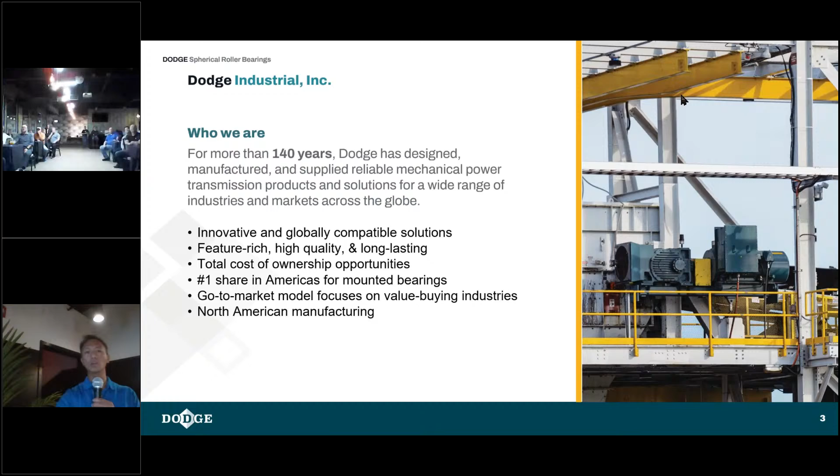The other thing that we want to do is innovate. This is another core belief that we have. We're always trying to improve products, yes, but we're also improving systems and ultimately offerings for our customers. The goal again is our customers. We want them to perform at the highest level possible. A couple of the innovations over that 140 plus year time span: Dodge created the first split wood pulley back in the late 1800s. And then in the late 1930s, we created the taper lock bushing. You see this in every sort of belt drive application throughout North America and around the world, so it's a really familiar product.

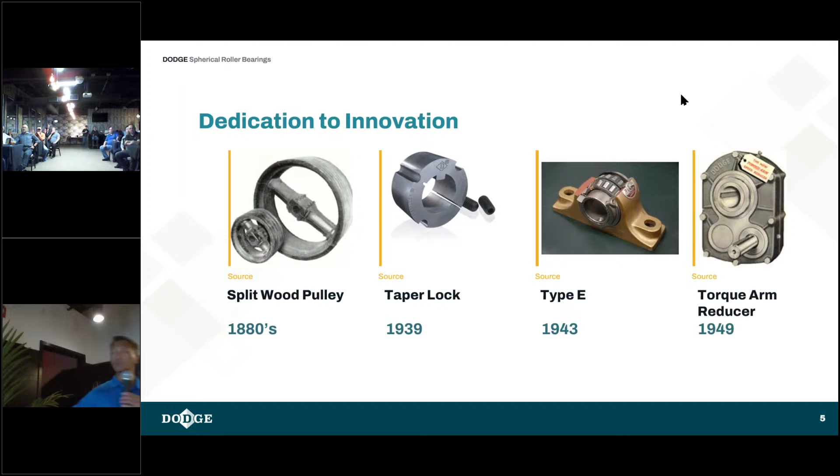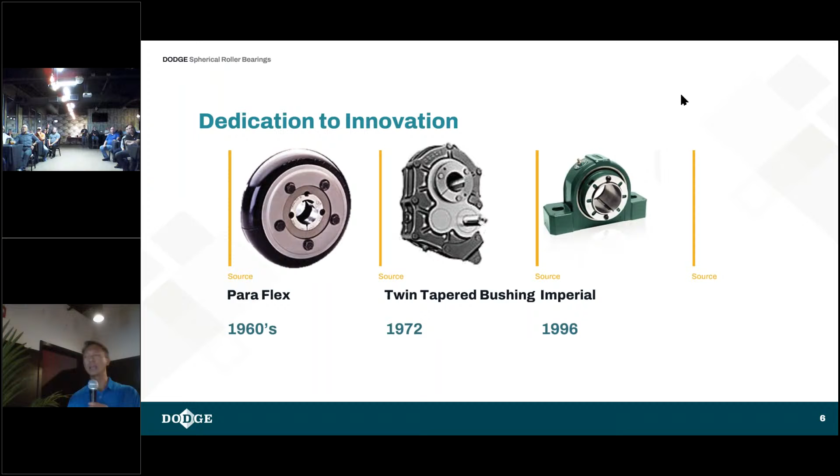In the late 40s, we created a shaft mount gear reducer. And on into the 60s, we created one of the first rubber tire couplings. And not to sit on our laurels, we make a product, we introduce it, but we continue to improve it. So in the 1970s, for the gearbox that we introduced in the 1940s, we created a twin tapered bushing locking mechanism, so it allows you to take the shaft off or install it really easily. And then in the late 90s, Dodge in-house developed a new locking device for bearings, the Imperial lock. And that's what we're going to talk about tonight.

In the past decade, we've introduced other products focusing on specific industries like the food and bev industry, requiring higher demand for safety and cleanliness. And we've even improved on our Imperial bearing that we came up with in the late 1990s by making the safety mount.

And again, we're going to talk about that this evening as well. And not to say that Dodge is completely a mechanical company, we've dedicated resources to producing our smart sensor, which is a condition monitoring device. That's our entry into the Industry 4.0 sphere.

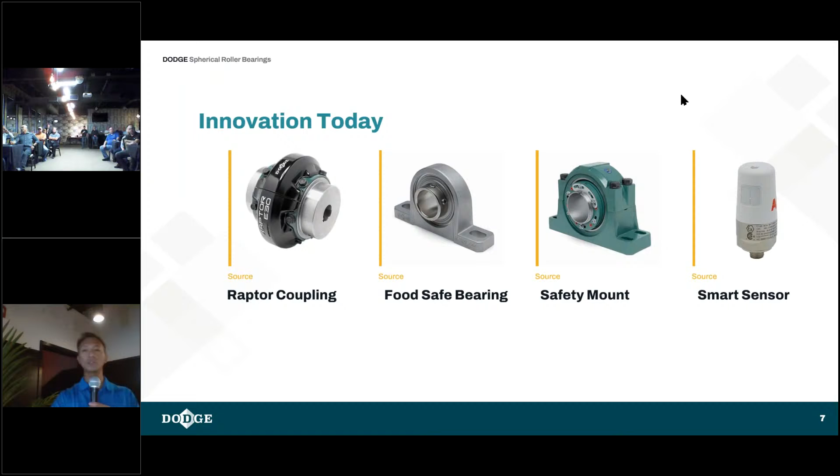So our spherical ISAF, what is it all about? Throughout your facilities, you'll see a fairly common bearing called the SAF. It comes in multiple pieces, assembled on site. There's a lot of interchangeable parts with many different manufacturers, so it makes it easily accessible to the masses. But Dodge, we found a different way of approaching the same problem.

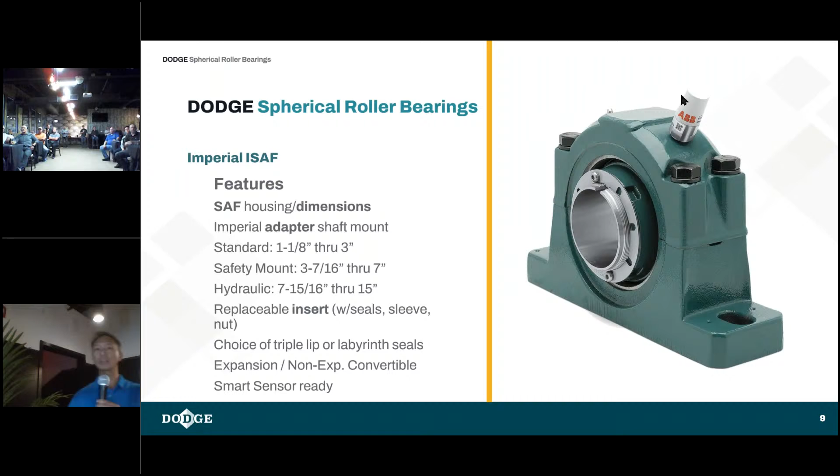With the SAF, the ISAF, it's the same footprint, so it's drop-in. We've introduced that Imperial adapter shaft mount to it. We have a full range of shaft sizes that we can work with. And the difference in the product is it's insert based or cartridge based. We're going to get into that a little bit later on here.

So what's the first thing that you think is going to happen to this thing? We've seen this graphic before, I'm sure. The majority of premature bearing failures, 80% of it is lubrication based. It's old, it's wrong, there's not enough, you name it, solid or liquid contamination. How do you mitigate that? How do you make sure that that doesn't happen?

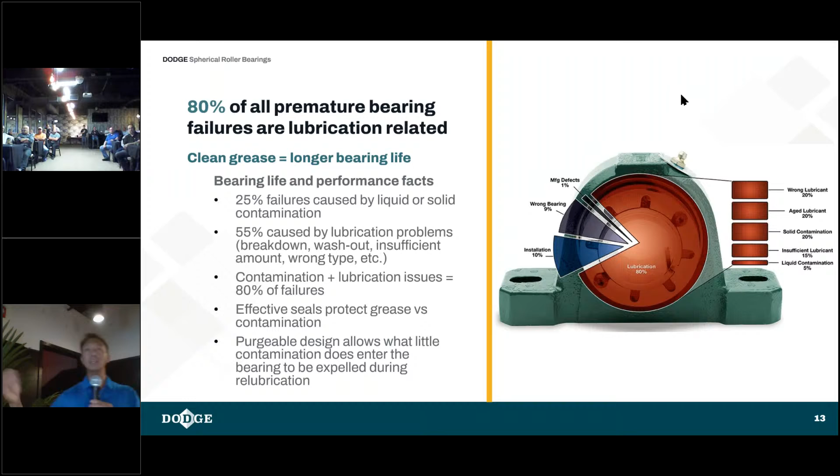There's 3 things you should be doing. Number 1, don't introduce it in the first place. Number 2, after you install it, you want to prevent contamination from getting in. And third, you should have some way of actually purging eventually what's going to happen inside that bearing. Contamination is going to enter, especially if the material is really fine. It's an eventuality. So how do you get rid of that?

Well, is this the environment that you work in? Does this look familiar? Maybe a little bit of an exaggeration, but not necessarily in some places. You have an open bearing you're working with here, so you're packing grease in that environment. What do you think is happening? You're introducing contamination from day one. Now, wouldn't you rather have something that just ships completely sealed, ready to go from the factory?

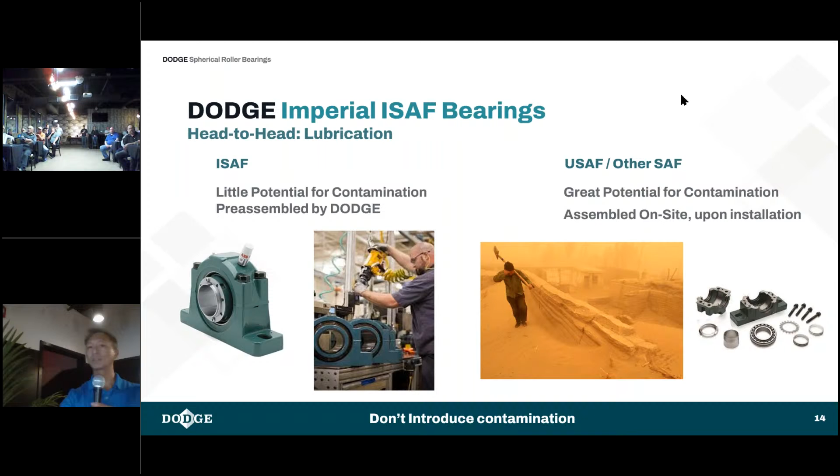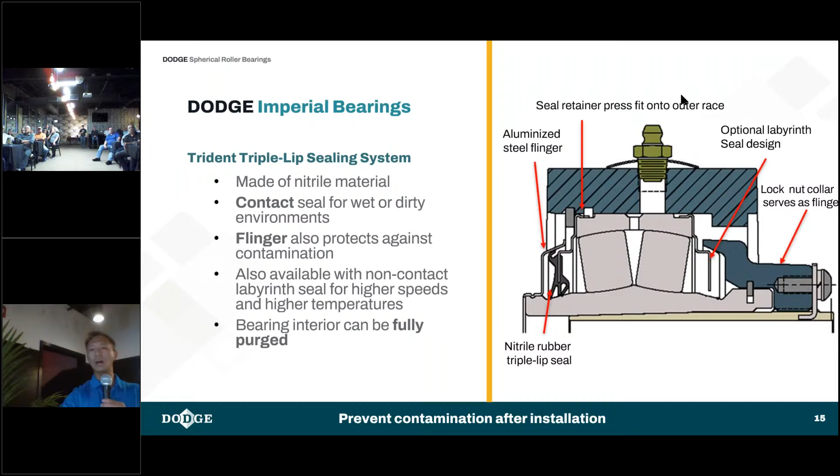So when you're pumping in fresh grease, it's a shell game. You're actually just moving the contamination over into this cavity. And then to add a little bit more pain, those LER seals are grooved, so you're moving more contamination into the groove now. As you can imagine, how much contamination are you actually pushing out of this particular type of bearing?

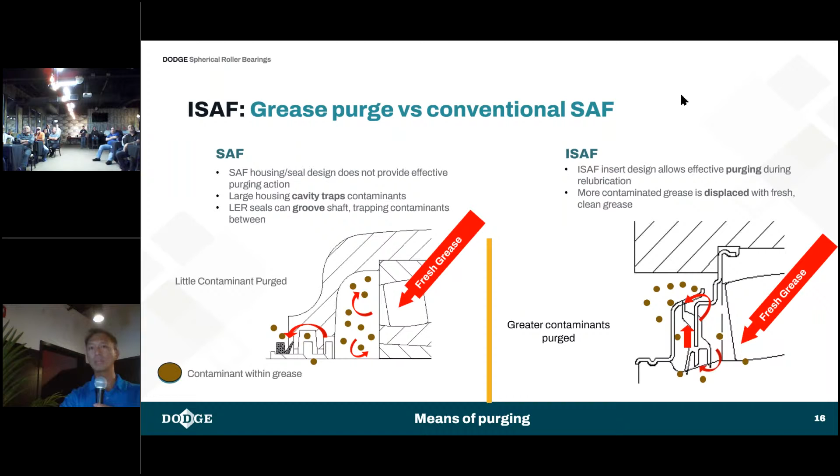Now, compare that with our ISAF. It's insert based. When you purge grease, you notice the shape of those seals are fairly unique. It's a one-way street here. We're pushing grease, it goes out with the contamination, and everything that's going with that grease is purged out. That's what we want to do to properly maintain the life of that bearing. So how is it that we can do this? Because as you can see in this picture, you can see that grease being purged out. It's rotating.

That's pressurized, we're using some means of pressure to push that out. Normally with a lot of bearing seals, you apply pressure to any seal and it's popping out. That is traditional seal design. Why does this happen with Dodge and that seal is staying intact? It's not popping out. Why is that?

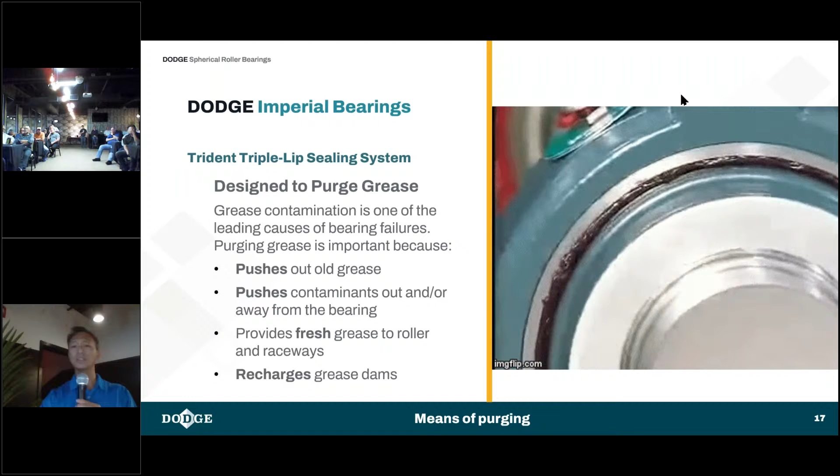It's because the seals are mechanically retained, so no human hand is actually touching that to insert it into the housing. It's a robot that does that. It pinches the seal so that you can apply whatever normal pressure you would, a grease gun, an auto lubrication system, whatever it is, you're pushing that grease out with its contamination. You're getting that fresh grease, and you're getting that fresh grease dam as well. So those are 3 things related to lubrication that really restrict contamination with our design.

Oh, by the way, let's talk about how much grease you're going to use. The factory knows how much grease fills that insert, and they're going to get exactly the right amount all the time. So in the field, when that SAF bearing is open, what are you doing with the grease? You're buying 5 times the grease to pack this thing in that exposed, contamination-based environment. And the funny thing is, I would hope the first thing you do after you pack all that grease with all that crap is purge it out. Does anybody do that? That's not the first step. So realistically, you could be spending 10 times as much grease to make sure you're doing it right.

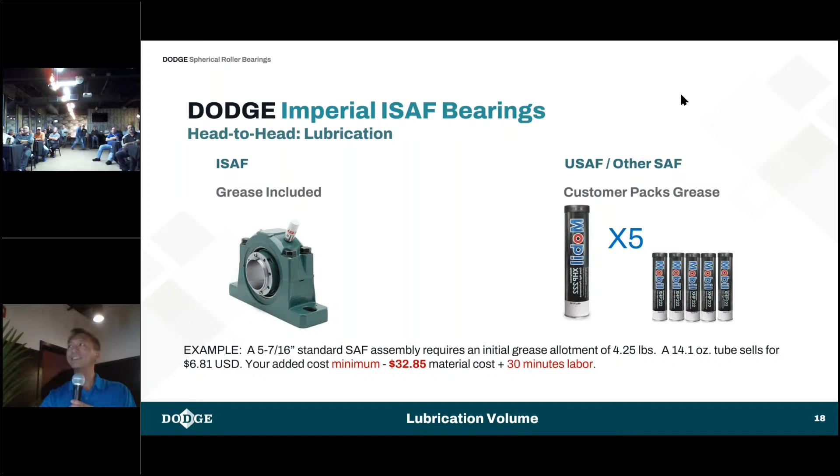So what other things should you consider an ISAF for? Well, it's one part number, right?

What's another good reason? How about this - it's easy to install. You guys know what feeler gauges are? How many of you have actually worked with feeler gauges? Yeah? You have a skill set. If you've worked with feeler gauges, you have a very particular skill set, and it's an absolute rarity to know how to do this effectively and properly.

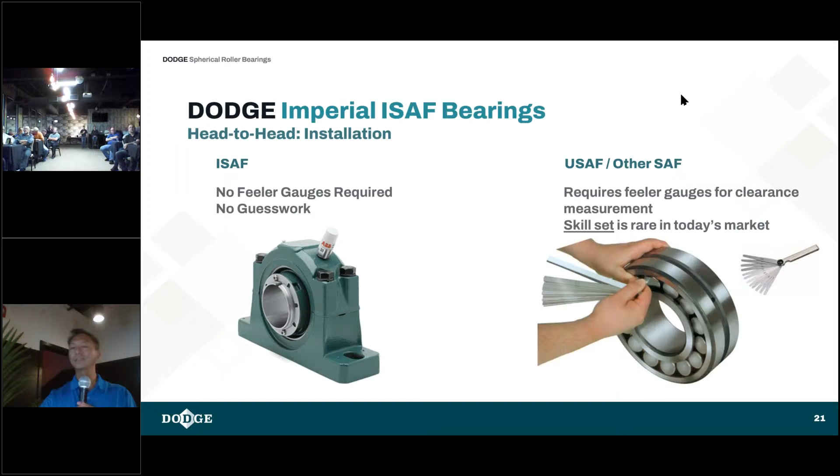So ISAF bearings, no feeler gauges. You don't have to stick those feeler gauges in here. I'll show you how to take the clearance out of these things. There's 4 steps to making sure you take out the clearance, check the clearance, etc. And these 4 steps, you may have to repeat them. If you don't get that clearance out, you're going to have to repeat this. And as the bore, the shaft size gets larger, it gets a little more difficult to do this process. You require more people, you require more time.

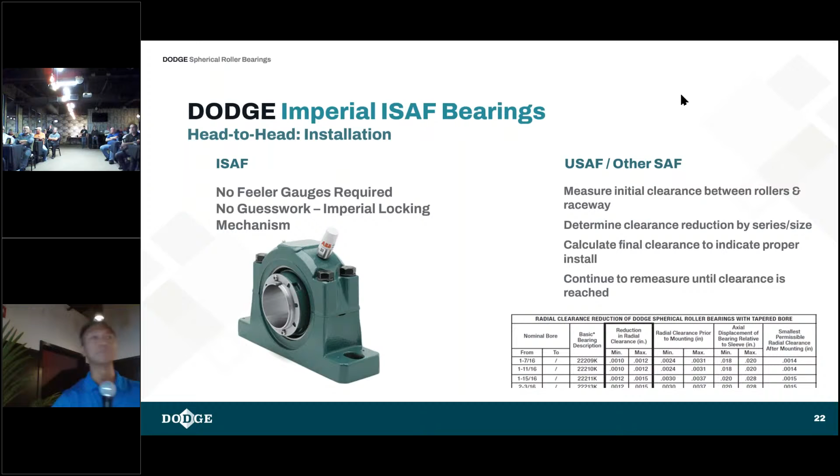So how do you install a Dodge ISAF? Turn something clockwise, that's it. That's all you're doing. In fact, you're hand tightening it to a 0 reference. And then I have a chart that tells you, whatever diameter it is, you put it through a couple more turns, either with a spanner wrench that has leverage or a hammer and drift. That's how you mount it. No feeler gauges - this actually takes the clearance out, sets it for you perfectly. And how does that happen?

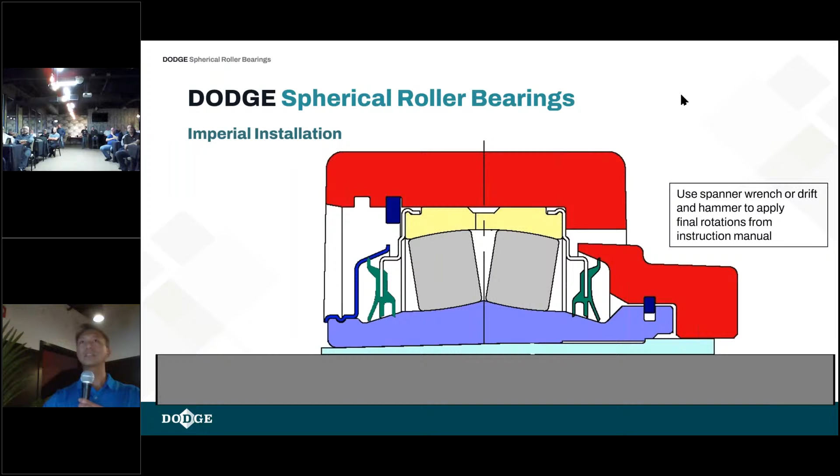If you focus on the blue wedge there, when you hand turn it, it moves, it pushes. Then when you use that spanner wrench or hammer and drift, you're locking it into place. See what happens? We'll back it up here. So it pulls. That's why we call this a push-pull adapter. That effectively sets the clearance for you, so you don't have to worry about feeler gauges.

Just as easy as it is to mount, it's easy to dismount as well. With traditional SAF bearings, there's a real challenge with dismounting these bearings. So how do we do it with our ISAFs? Counterclockwise, same process.

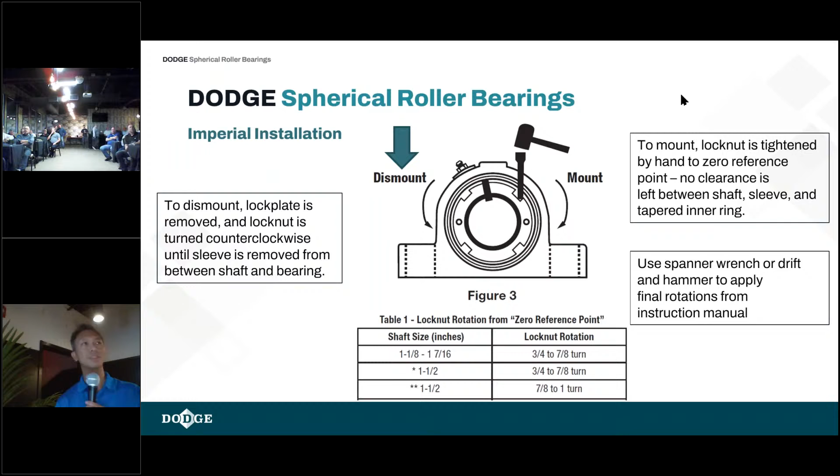This is one way to remove an SAF bearing. Don't know if the sound will go through, but so how many of you have actually seen that before? Yes? Winner. Yeah, you may have done this yourself.

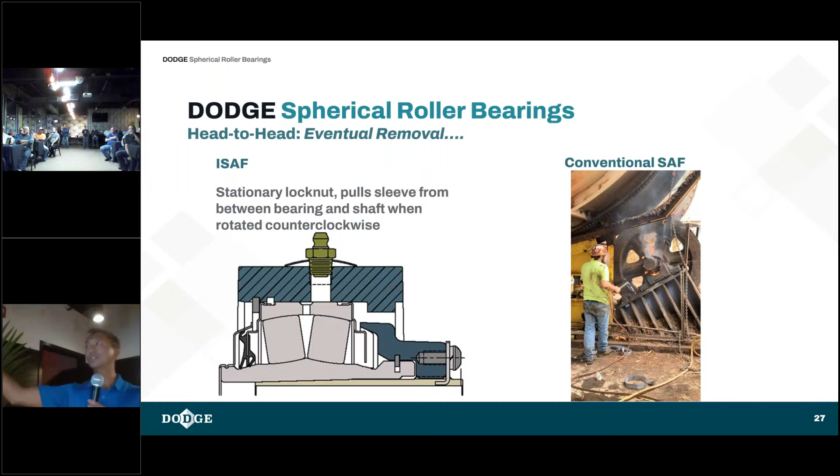What does this require in a facility? You're going to need some sort of permitting, right? This is hot work. You're going to need time. You're probably going to need a new shaft after you do this, right? So look, with the ISAF, this isn't how you dismount. This is a lot easier to work with, right?

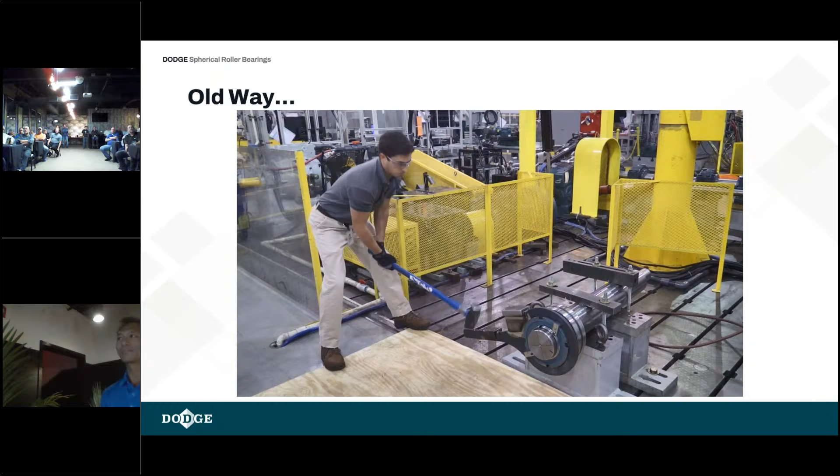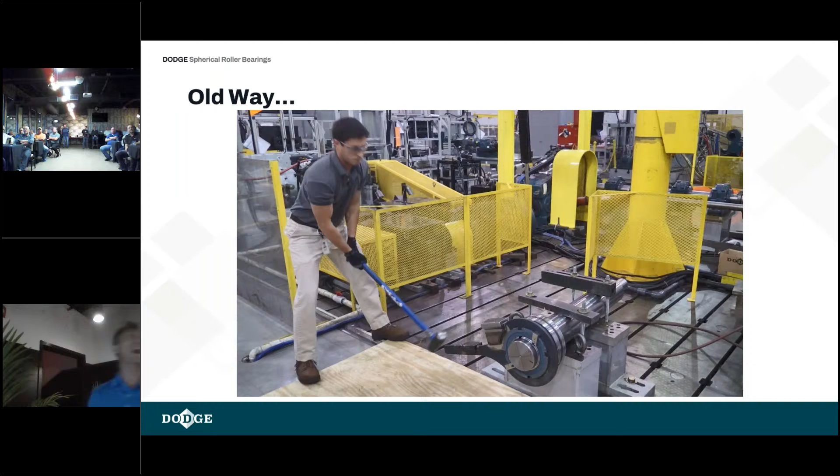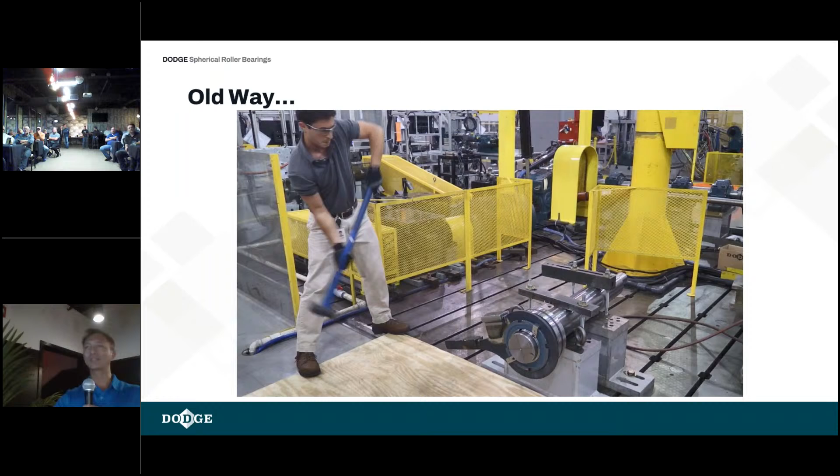Here's another nice little video you can see. Have you seen this? That's too painful to watch completely, so we'll just cut it short there. This is another way of unlocking that adapter from that shaft. That's usually the first resort before you take that torch out.

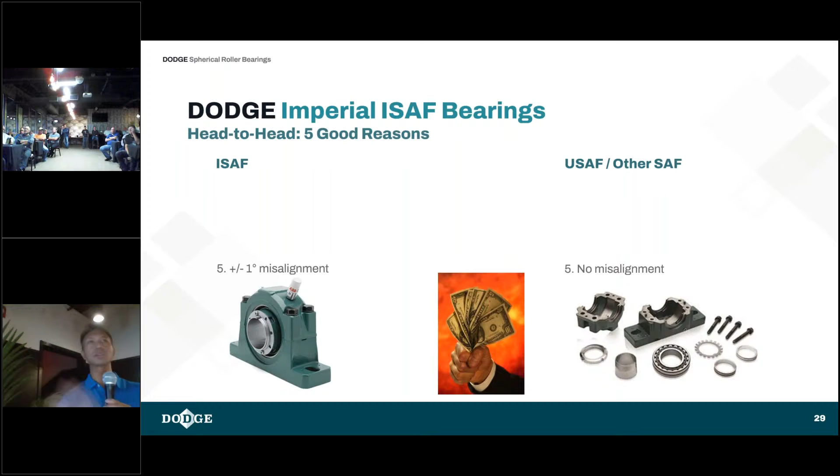Another good reason I'll share with you, the last one — this is about misalignment. With the ISAFs, there is plus or minus 1 degree of misalignment. We all live in a perfect world with no such thing as misalignment, right? So when you're working with an SAF style, there is no capability for that seal to handle that misalignment. The difference with the ISAF is that seal is contacting 100% all the time, and it's an insert cartridge that moves with the shaft — so does the seal, it's moving with the whole insert. That's where that misalignment capability comes about. With an SAF, you can go a little bit off kilter, and now you're depending on the seal to deform in a way it was never designed to handle misalignment. That can be dangerous — you go too far and that seal just opens up.

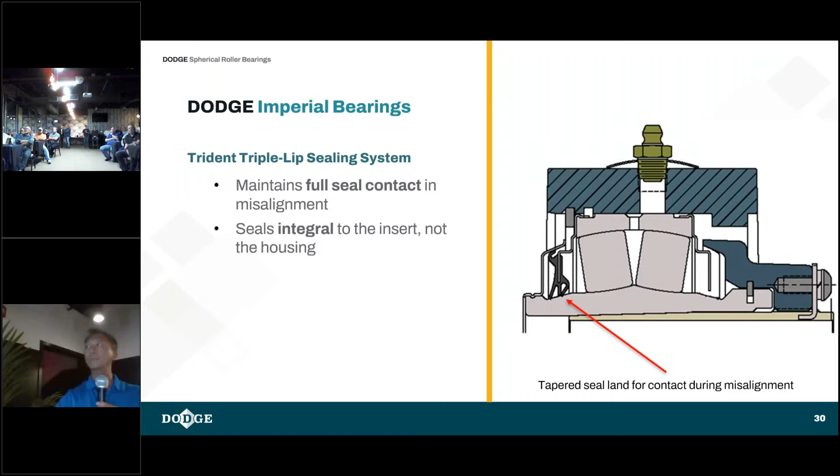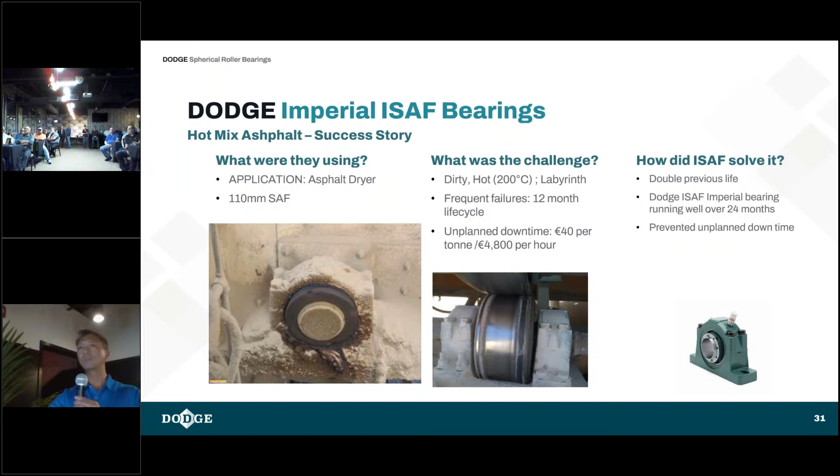What did ISAF do for them? They doubled their previous life — that means 24 months plus. And of course, they prevented any sort of unplanned downtime because they weren't sure when within that 12-month cycle that SAF bearing was going to fail. That's where good condition monitoring works, right?

So is there a way we could improve this design? Why would we need to? Would we really need to? This is the third core principle that Dodge has. We make high quality products, yes, but we want to do it in the safest possible manner. If we can increase the safety level of that product as you're installing it, we will find the way. And this is what we did, because remember our buddy here with the torch?

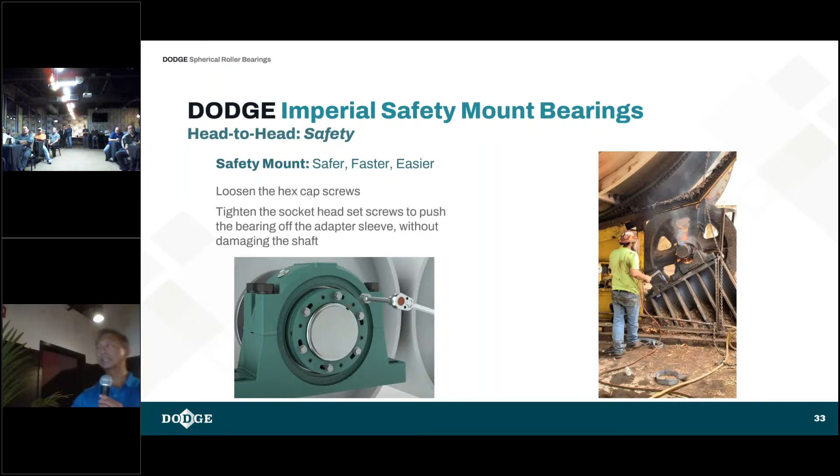Even with our locking mechanism, the Imperial locking mechanism, what's going to happen is that you are still using a hammer and drift, or a large spanner wrench, and that can be dangerous too — causing potential sparking or whatever you're doing when you're hammering the locking mechanism down. So there's an inherent risk as well, just like an SAF. So what we've done at Dodge is find something that was faster, easier, but also safer. Lo and behold, we're just using hex cap screws now — no spanner wrench, no hammer and drift. So basically it's tightening and loosening hex caps.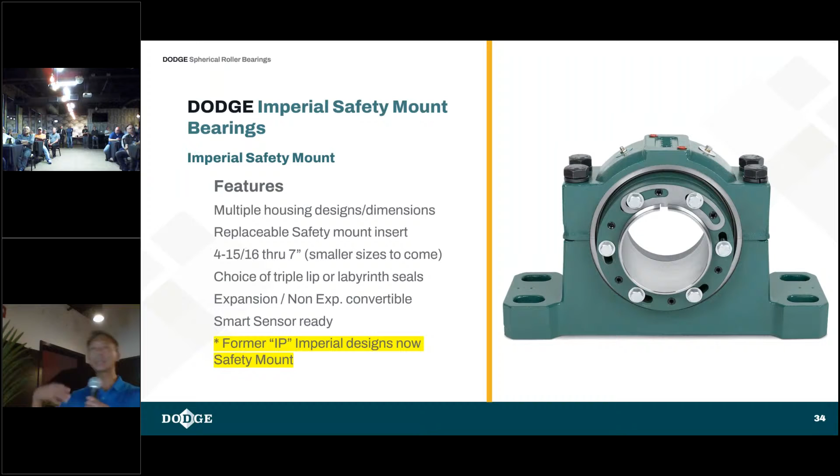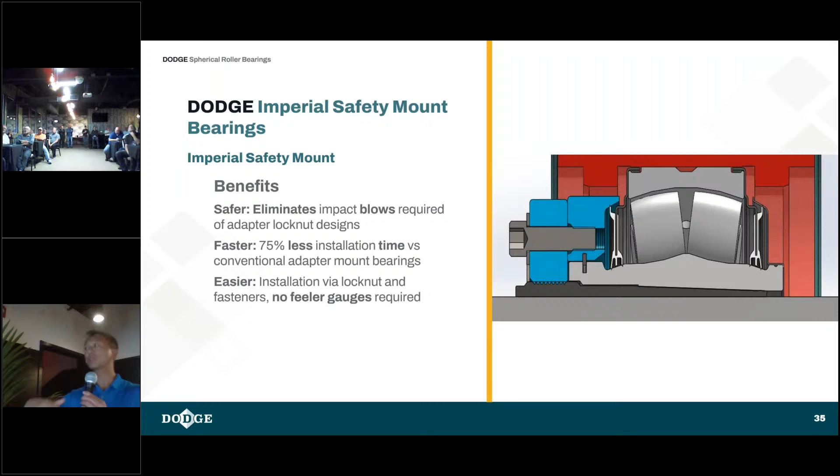So it's the same SAF footprint. It's the same replaceable insert. It's the same seal system that we're using, except instead of having to deal with that hammer and drift or spanner wrench or any sort of blows, what you're working with is a hex cap system. So these ship with these hex caps attached. So what you're doing is you're basically hand tightening it, just like our normal Imperial adapters.

You're marking alignment, then you loosen the hex cap bolts. But you notice it's an internal nut. So you're basically moving it to the other side of the slot, and then you're tightening it after that using torque. So it's a really simple system. And when you're dealing with diameters of like 4 and 15/16 to 7 inches, it's not massive, but it's still a good size. You need a lot of leverage or a lot of hammer blows to turn that locking mechanism. So

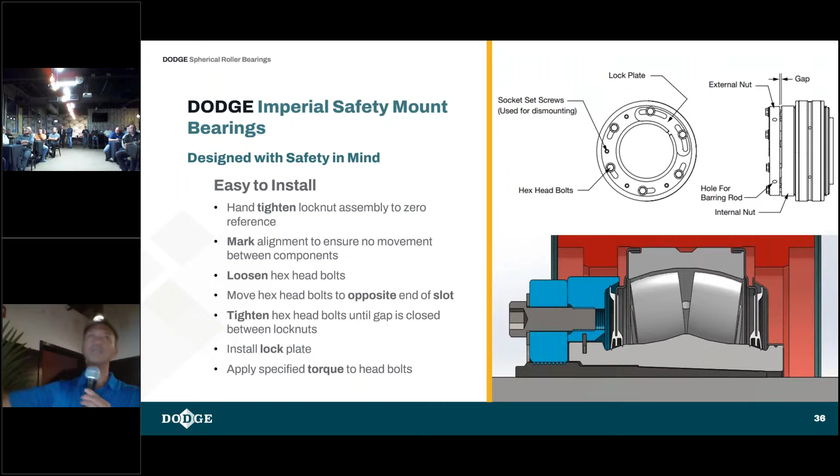This safety mount does it a lot easier, safer, and to dismount, you're doing the opposite. You're removing the hex head bolts, but we also have jack screws. So you're disengaging the external nut from the internal nut. Makes it a lot easier. And we're giving you an assistance here to actually help out with that. So this definitely is about safety to ensure that no one's getting hurt at the end of the day.

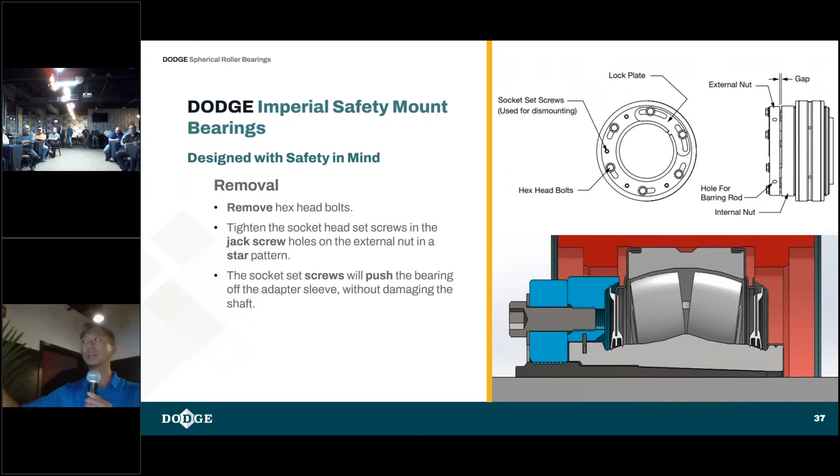Can we improve on that? Okay, what happens if you're dealing with a shaft diameter of 7 inches to like 15 inches? How do you deal with something that large? There's some pretty serious work to be done on that. This is why we introduced the hydraulic ISAF. So, same idea, except hydraulic pistons is what we're using. So you're hooking this up to a power pack to disengage the locking mechanism or engage the locking mechanism, whichever you're doing.

So the safety mount, this hydraulic ISAF, they're all the same in the fact that there's no feeler gauges again, right? They're replaceable inserts. That limits your critical spares. You don't have to have the whole block sitting on a shelf. Now all you would need is the actual insert. So that ultimately reduces your costs and reduces your inventory.

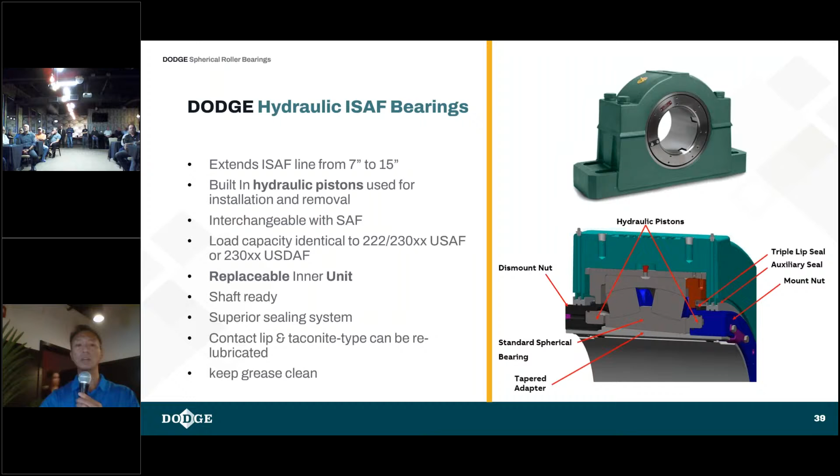Here's a really nice success story from CSX. This is a loadout facility in Toledo. It's an iron ore loadout facility. So they were using SAFs, and the installation time was 48 hours. You can imagine that. And they had challenges, setting clearance, bearing failures, things like that. And how did they actually solve it? Well, you know what? This is one of those success stories that I like to read. I'm going to read verbatim what this Ron Davenport said about this installation.

He said, keeping the bearing from being contaminated in the outdoors is nearly impossible. Would you agree with that? A bearing changeout never seems to happen on a nice day. It's usually raining or snowing, and that makes it tough on the team. Plus, you really have to know what you are doing, especially understanding how to set the tolerances just right. We spent a solid 48 hours changing out that bearing. Not only is it a fight to get a failed bearing off, but the bearing also destroyed the shaft. So it had to be changed out as well. That's when I seriously began considering using the Dodge hydraulic ISAF bearing because I knew there had to be a better way. And just maybe this was it.

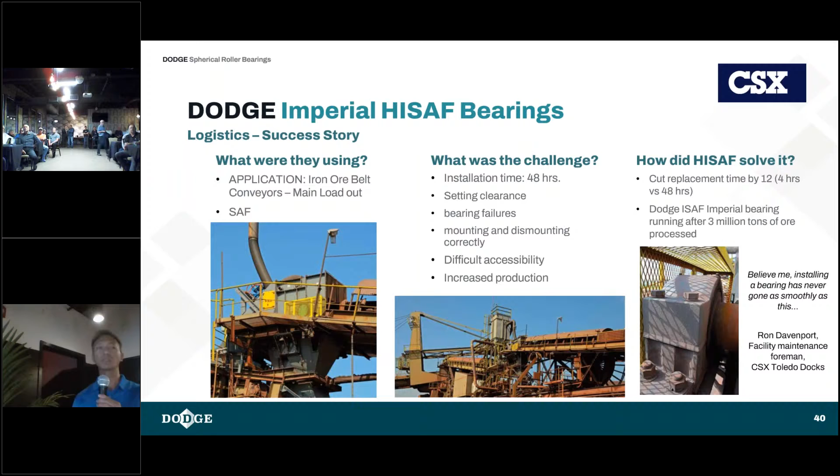So just a quick summary, why would you consider ISAFs? Well, it's one package, not 100 different part numbers. It's factory sealed. You cannot introduce contamination into this system. The amount of grease that you're using would be excessive for the SAF versus the ISAF. The factory knows how much to put in it perfectly.

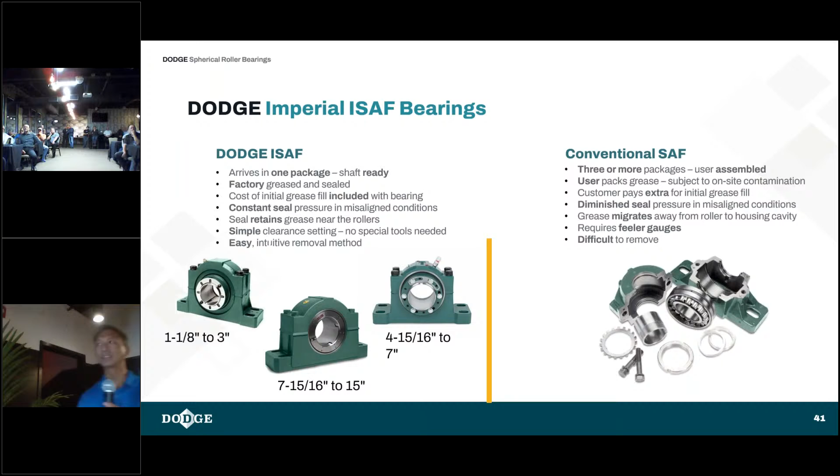And the seal, the actual seal system is really what shines in this because it's purgeable. It prevents and it allows you to refresh as well. And the big thing here, feeler gauges, no more feeler gauges. So that being said, it's easier to install and easier to remove. So any questions?

Yeah, go for it. Coming from a reliability standpoint of having these in storage, what is the life expectancy to have it on a shelf before use? Do you need to do preservation to avoid brinelling, as well as the grease component inside of it? When does it start to break down, or can you just simply purge it?

To answer Steve's question there, just had an example here with Timberland out west there. We had a hydraulic bearing that had been on the shelf for 5 years. I worked with the product specialists. Don't worry about brinelling. They're good for 7 years on the shelf to keep as spares. And yes, as Kelvin described in the presentation, 100% purgeable. Prefer it when it's running.

I got one more question because I love doing BOMs and CMMS, so this hits home for me for many different reasons. Are they rebuildable? Is this something you would send back to the States? Is it economical? Because I know the cost of the housing is probably the most expensive part in some of the larger bearings. Is it economical to have them rebuilt? Do you rebuild them, or do you recommend just a replacement? So I can actually answer that question, Steve. Do you have a robot that can actually pinch the seal into the housing so it becomes purgeable?